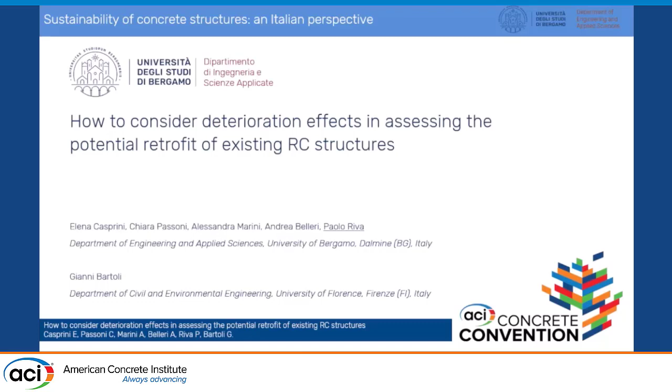My talk somehow reconnects to the first one from Liberato in one way, and concerns how to consider deterioration effects in assessing the potential retrofit of existing reinforced concrete structures. I'm not talking about material, but how to evaluate the durability of structures, and so whether it is worth repairing or renovating or demolishing.

We know that if you look at the Italian building heritage, over 60% of the reinforced concrete buildings were built before the 80s. They are obsolete and energy inefficient, and they're usually vulnerable to seismic hazard because they were not designed considering earthquakes, whereas Italy is totally earthquake prone.

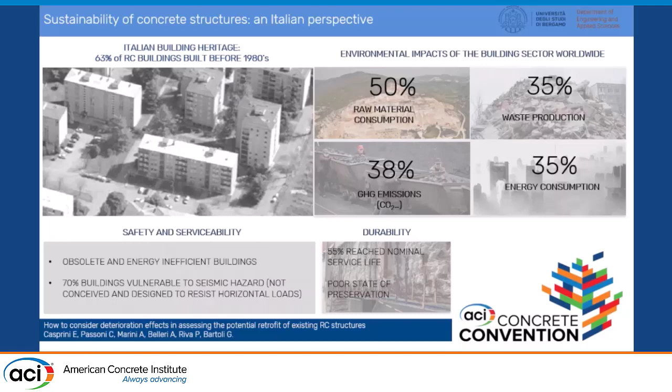And we also know that the environmental impact of the building sector is extremely high, as it's responsible for 50% of raw material consumption, approximately 35% of waste production, 38% of greenhouse gas emission, and 35% of energy consumption. So under this respect, the question arises,

demolition, reconstruction, or renovation? If we look at demolition and reconstruction, there is a huge problem of waste production and disposal, invasive and impacting operations, large production of raw materials, relocation of inhabitants, the last point being the main issue. If a building is not empty, it's pretty hard to relocate everybody.

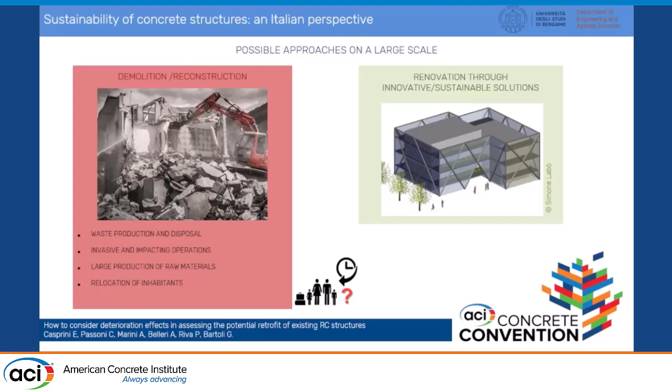The other option is renovation through innovative sustainable solutions. And the idea is to apply a life cycle thinking approach, which entails several steps. For instance, the idea is to use sustainable materials, to consider repairability of the solution, demountability, deconstruction and end of life, and also updating, upgrading of the building during the life once new technologies become available.

Well, we applied these principles to several projects. This is, for instance, an AdESA project, and we tackled approaches where we used steel exoskeletons, wood exoskeletons, but also concrete shear walls on the outside, and generally thinking of working from the outside of the buildings without relocating anybody. And we have also done several applications in real buildings. So there is a future there.

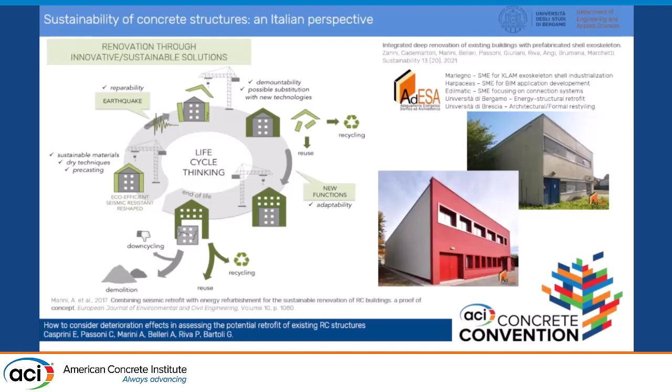However, the problem is quite serious if you look at the deterioration state of the buildings. We have to devise some tools to decide whether it's worth repairing or the building needs to be demolished. And well, the question is like the rotten apple. The apple looks perfect, but in fact it's rotten inside. And what we found is that assessing the state of deterioration of concrete structures, particularly concerning corrosion, is not as easy as it is said.

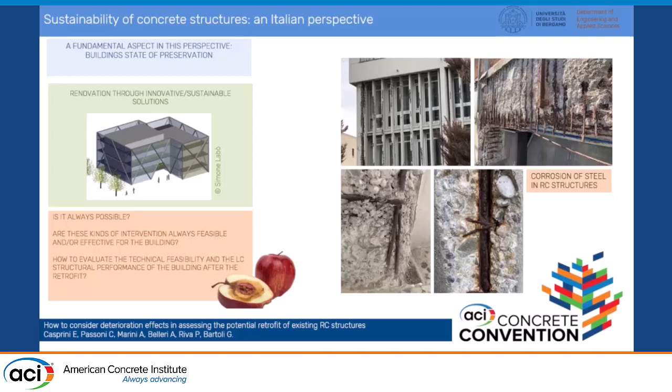And the main reason is that it involves different types of expertise, and experts that are not always used to talking to each other. Very often the structural engineer is the one who tackles the building, and most of the time he's not aware of the consequences of corrosion. So we tried to devise a tool, a protocol, which would allow the practitioner engineer to tackle correctly the deterioration evaluation of a building.

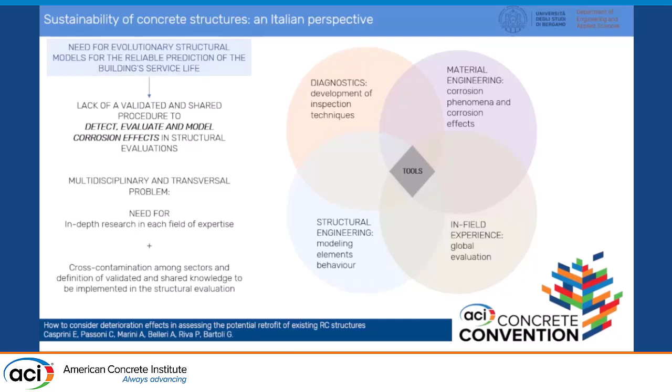And so we went through defining, as a first step, a building inspection. Through the building inspection, we gave criteria and guidelines to define a scenario. So let's say a corrosion risk scenario that depends on the environment, on the condition of concrete and so on. And eventually this allows us to define, as we'll see, material models, let's say, equivalent damage parameters to be used in structural analysis.

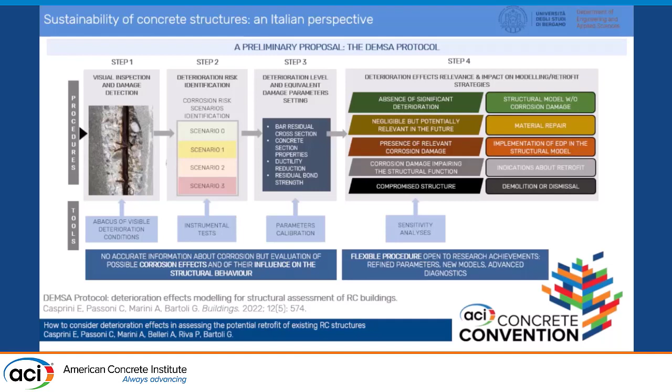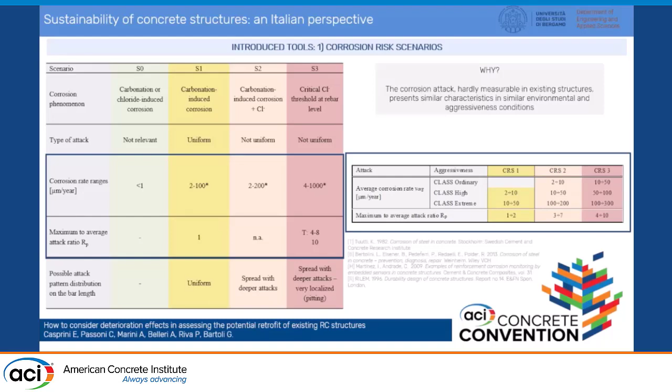So we devised 4 types of scenarios, depending on whether there is no carbonation or chloride-induced corrosion, or there is carbonation only, or carbonation plus chloride ion attack, so presence of chloride ions, or eventually corrosion due to chlorides. So depending on the scenario, through non-destructive tests and on-site tests, fairly simple tests, we end up trying to define risk classes.

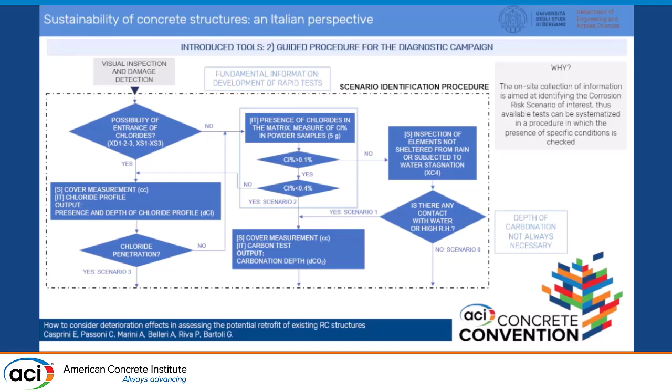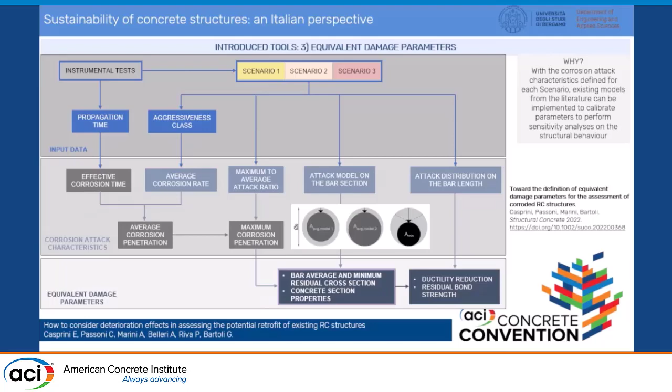So we provide a logical path that the practitioner can use. And so this would eventually allow us to define simplified engineering design parameters that can be used by the practitioner to assess the residual life of the structure. I'll go through the slides that show how the practitioner should work and try to define the type of risk scenario by looking at the damage type which might be observed and through some simple on-site tests.

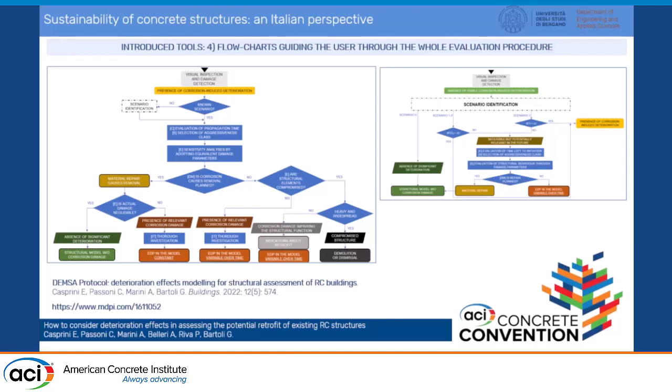And this is the complete protocol, which has been baptized DEMSA protocol and is available in the literature. But the final goal is this. The final goal is to put practitioner engineers, through proper equivalent damage parameters, in the position of assessing the residual life. So if A is, for instance, the time of analysis of the structure, and he is able to define the residual life, and this is the design limit condition, he might decide to intervene at A,

for instance, with a repair, just trying to freeze the condition without any real improvement, or he could wait up to B, a given time, and intervene to bring back the structure to its original state and therefore relaunch the residual life, or even to enhance the initial behavior of the structure and to relaunch even further. Of course, this is a twofold tool, because sometimes these tools indicate that the only really sustainable solution is reconstructing.

Nowadays, it's very difficult to give objective tools that might be used to decide whether a building is worth a renovation process or reconstruction is the only solution. And this is the whole idea of the protocol.

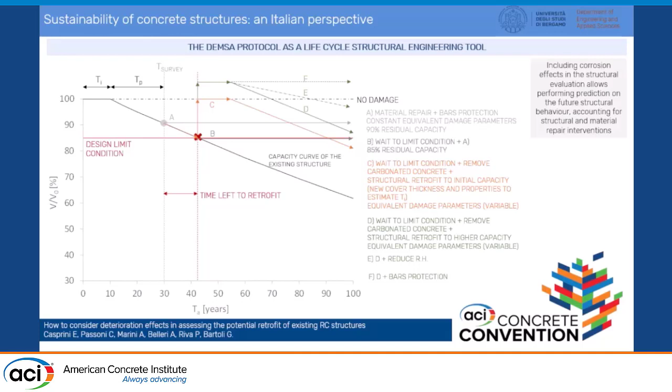The ongoing research in our research group is trying to recognize corrosion patterns in existing structures, define simplified corrosion patterns which can help the professional engineer to define the risk scenarios I previously mentioned. We started on buildings, and now we're starting to work also on bridges, because of course on bridges the issue of corrosion is well known due to the use of de-icing salts and other issues.

So the problem is this kind of research requires a lot of cooperation. It cannot be carried out by structural engineers alone, it doesn't make sense, and it cannot be carried out by corrosion experts alone, because the impact on the structure eventually requires the structural engineer. And testing engineers: we need to define simplified tests to define chloride content. There are tests already based on the analysis of powders and so on, but there is much more to be done, and I think this is a way in which it's worth investing.